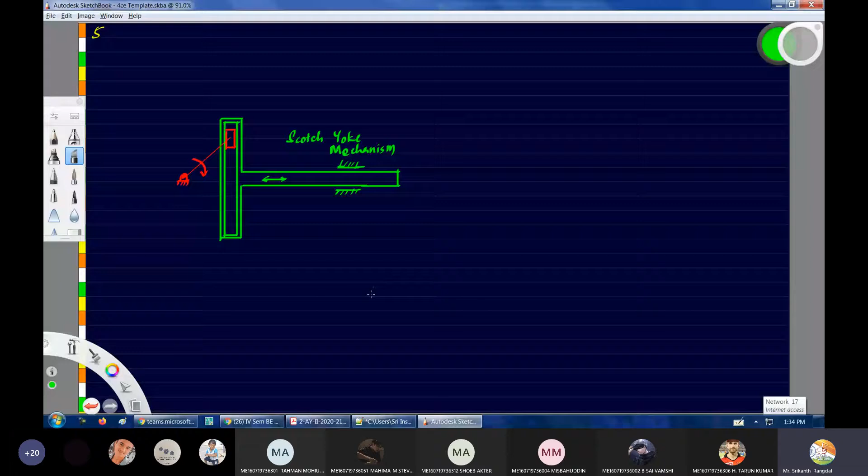So do you want the lunch hour to be extended a little? Fine. I'll just have a talk with the department HOD sir, and we will see whether the lunch hour can be extended. So let's proceed with the class. Even for lunch hour, it's too late, right? More than 1 hour is over. Anyway, the class is getting recorded, so let's not worry about that.

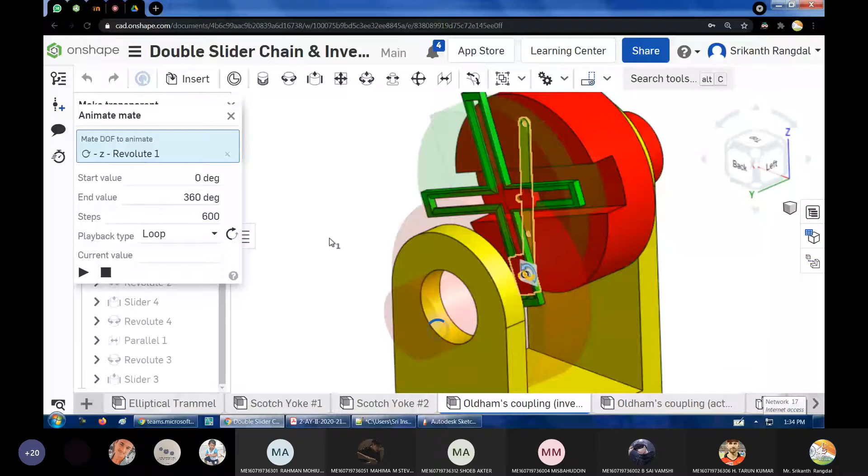Okay, so I was talking about this mechanism, right? The Oldham's coupling. So how these mechanisms can be the same, even though they are so different in shape, will become clear when I animate them. Okay, so shall I start? Let me see if it works perfectly. Hopefully it will. I have tested it multiple times. It's taking time. Yes. Okay.

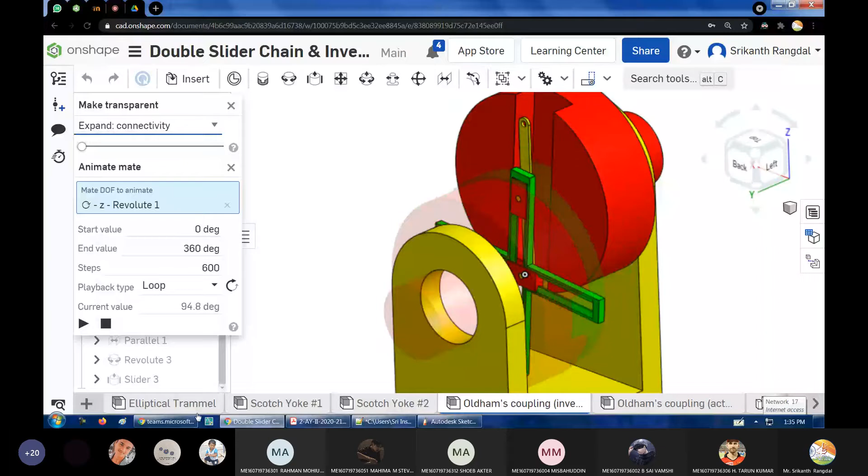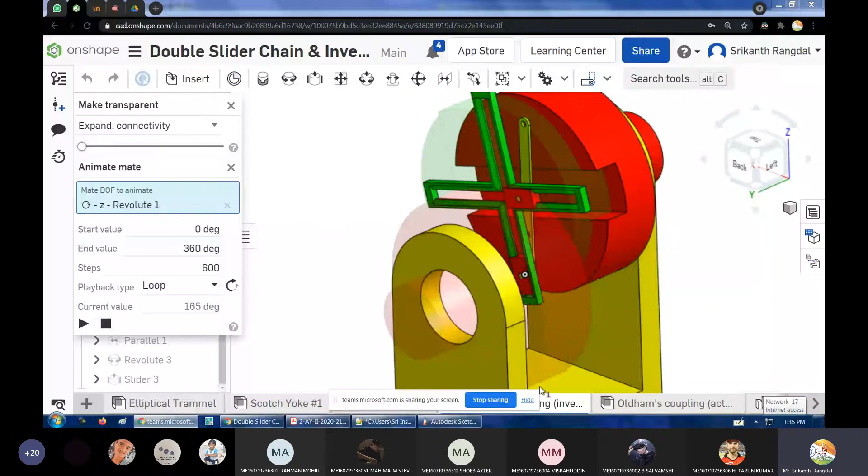Are you able to see how the motion is happening? Is this clear? Yes, sir. Here the yellow link is fixed, sir. Yeah. The yellow link is fixed. You can see this vertical rod is the same as the frame, which is so different in shape. And the red links, they are the same as these discs. One disc is getting fixed on one side of this yellow frame. The other disc is on this side. Are you getting it? Yes, sir.

Yeah. So this is how the motion happens. And this is why these differently shaped links are actually the same as the previous link that we have seen. Okay. Is it clear? Any doubts here?

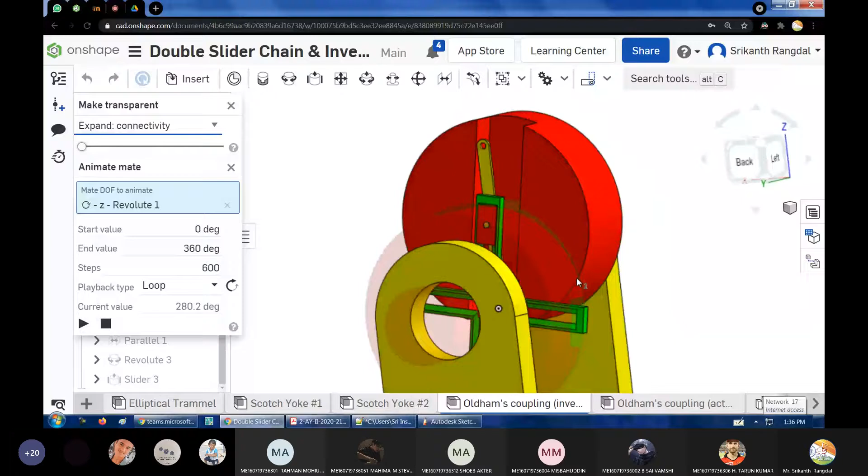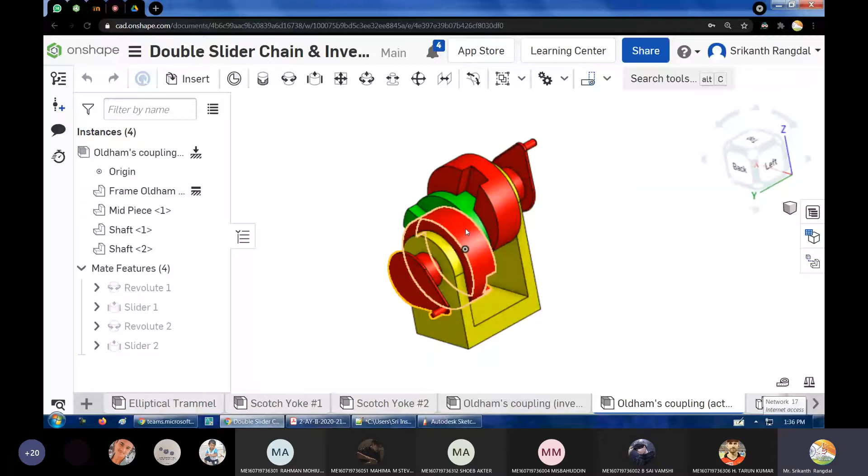Yeah. So this is how the actual Oldham's coupling is going to look like. You can see I have placed some handles on both the sides for the red linkages, and there are grooves in which the sliding will take place. Let me make it transparent so that you can see how the grooves are fixed. Can you see the grooves? These grooves will be sliding inside each other.

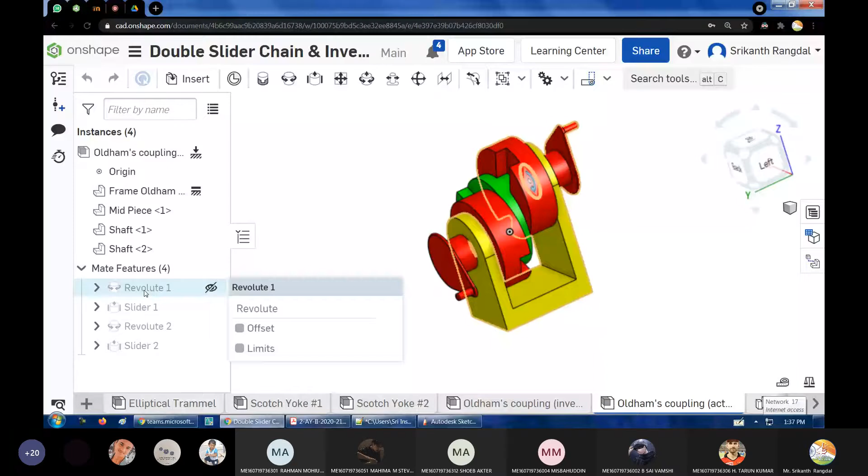Okay. So now let us see a few rotations of how this one animates. Ready? Okay, so there it goes. Can you see this? So the green link is sliding in the grooves of the red links.

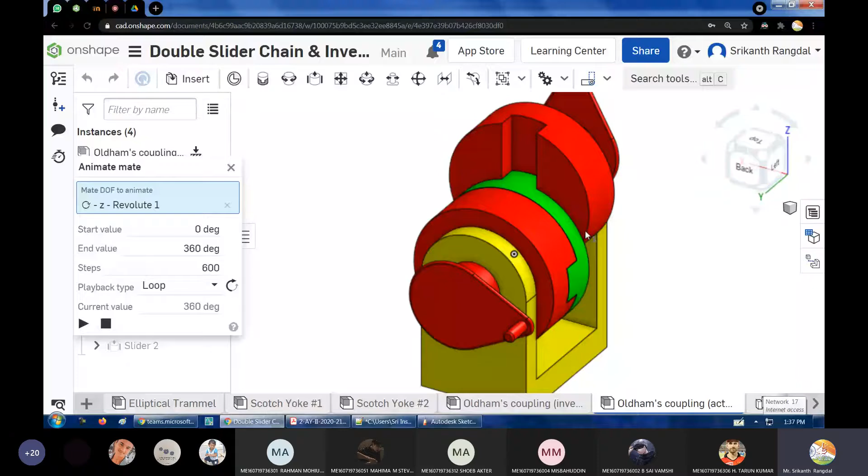And what is special about this mechanism? Can anyone point out what is special about this mechanism? In what practical scenario can we be using it? Anyone? Transmit the motion. Sorry? Transmit motion. Okay, so one of the red links will be input, the other link will be output.

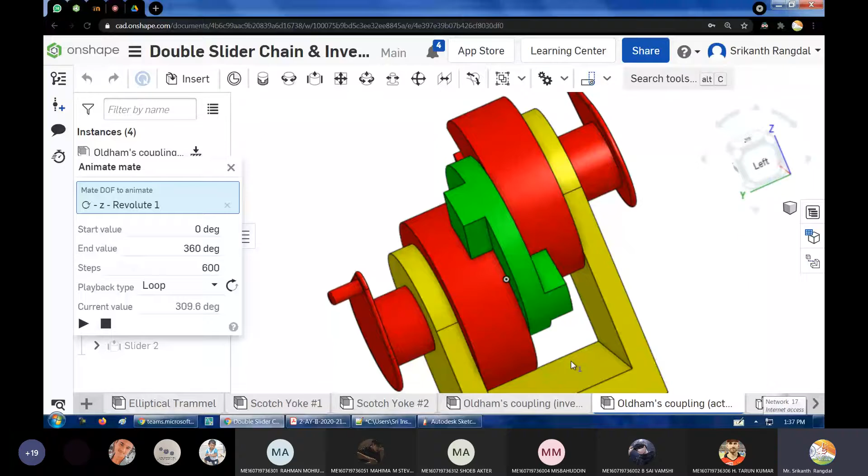Now, what is special about this transmission of motion? The special thing is you can see that the two shafts are not collinear. They are not in the same line. One shaft is here, the other shaft is offset from this, parallel to it. Correct. So the input and output shafts are not collinear, and neither are they intersecting. They are actually parallel to each other.

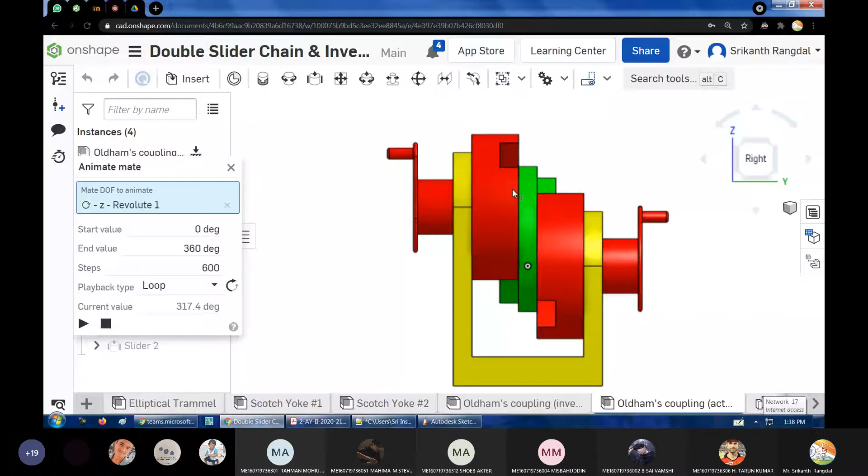And even when the shafts are not collinear, the motion can be transmitted. This is what makes this particular mechanism special. Okay, is it clear?

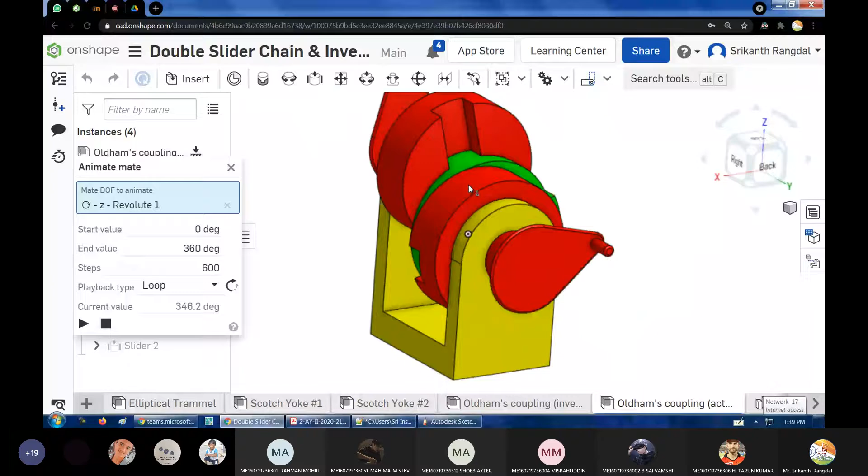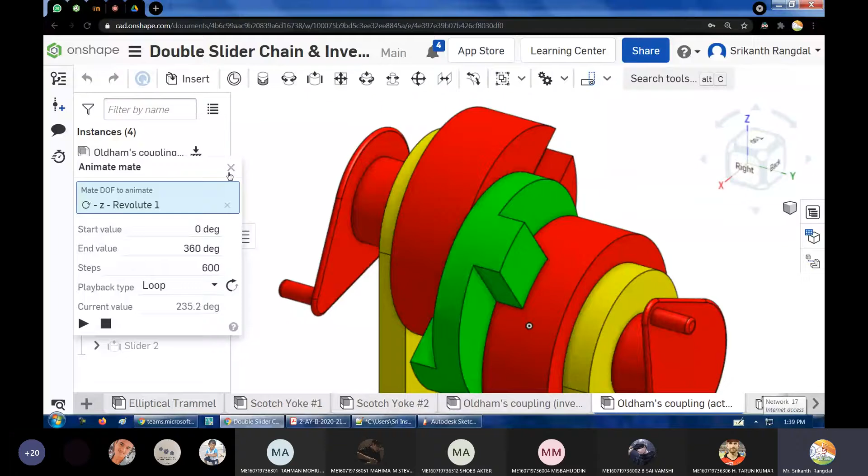Now in this mechanism, you will get problems on finding the sliding velocity. These two surfaces, the green and red, are sliding with respect to each other. So we may have to find the sliding velocity between these two links. So those are the kinds of problems which we may have to solve. Okay.

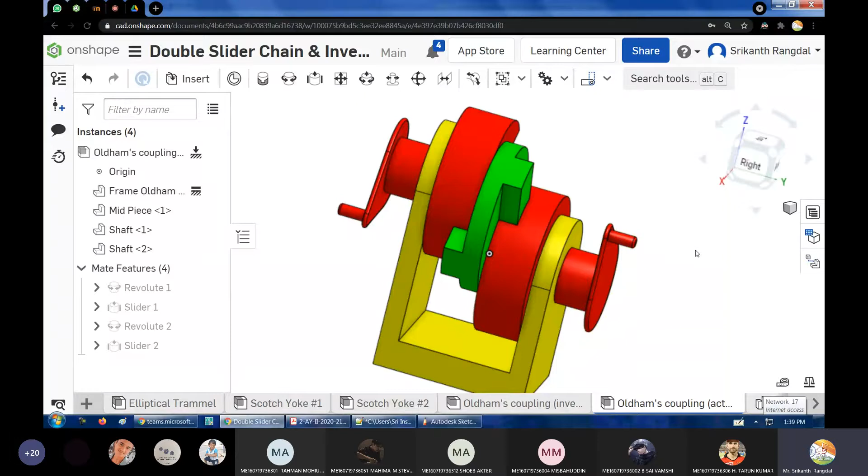So not only can you animate, but you can just click and drag, and it will function exactly as though it is moving, as though it is assembled properly. Okay. So this is the Oldham's coupling. Any doubts here? Any doubts? Is this clear? Yes, sir.

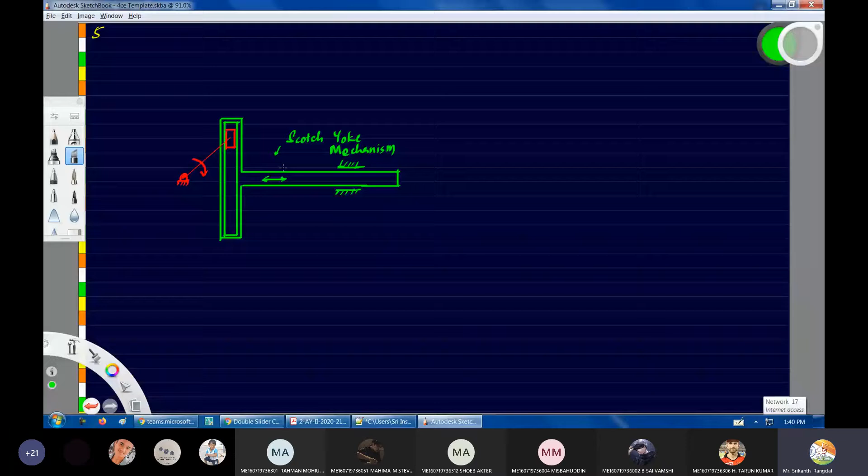Okay. So even though I'm showing you all these mechanisms in 3 dimensions, you should be able to draw them in 2 dimensions. So the Scotch yoke mechanism I have shown here with the diagram already. When it comes to the elliptical trammel, you should be drawing somewhat like this. Use a scale wherever possible, and you should be able to draw it like this.

Okay, can I use rubber? Okay. Mhm.

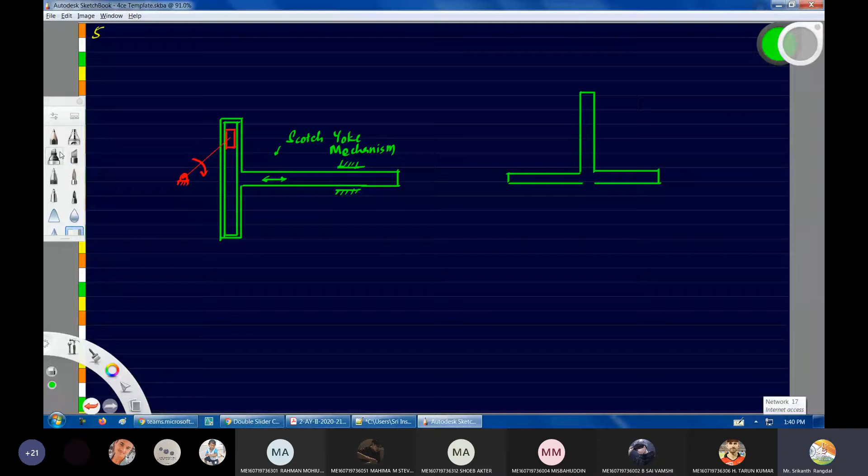Okay, so like this you can draw the elliptical trammel. Let me choose a different color. So here you will have the slider and the slider here, and we can go for another different color. Okay, so this is the connection link. That link we have to extend on the other side, and then that is where we'll have to write.

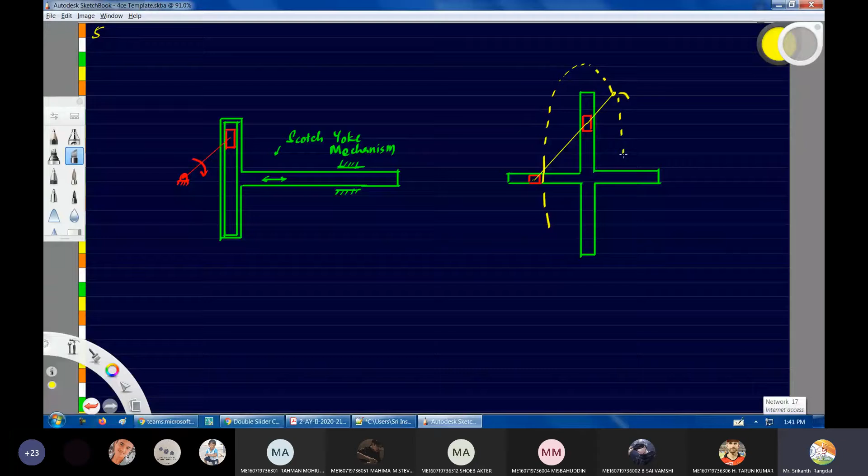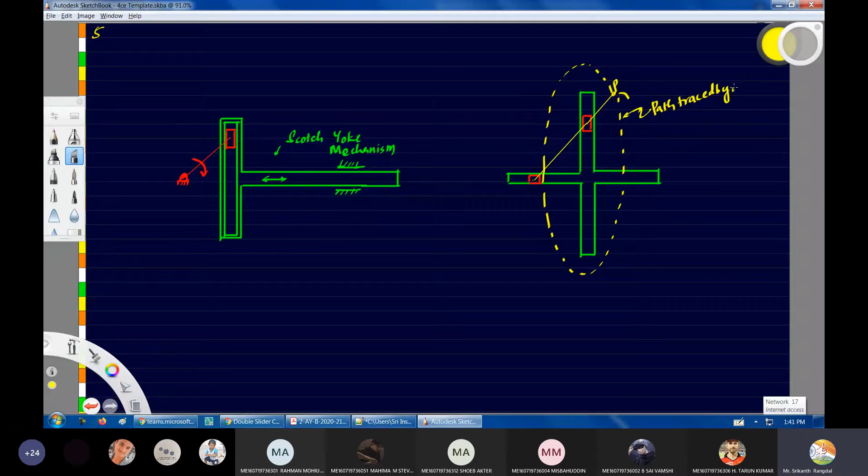Fine. So the path traversed, you can show it with a dotted line like this. So this you should show as the path. You can say the path traced by the point P. Path traced by point P. Fine. Then this is the frame.

Whenever you draw the diagram, it's very important that you label them. So here we have a slider, slider number 1, and this is where you have slider number 2. And this here is another link, a straight link. Okay. So this is how you should always label the diagram.

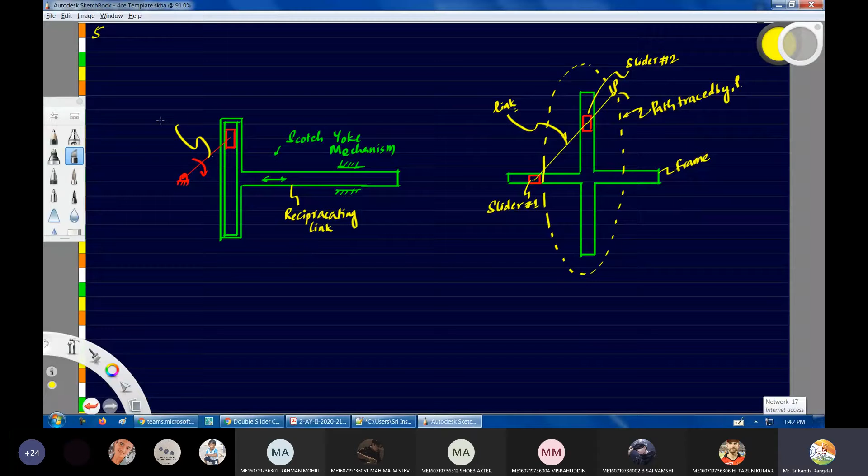This is the Scotch yoke mechanism, and this you can call the reciprocating link. Even though it is the frame in the case of the elliptical trammel, in this case it is acting as a reciprocating link. Whereas this one is acting like a crank, and here we have the slider.

And this fixed part is where the frame comes in. So the same frame is actually here as well. This part and this part, the fixed parts, are both the frames. Okay. So whenever you draw the diagram, make sure you are showing it neatly by labeling each and every part.

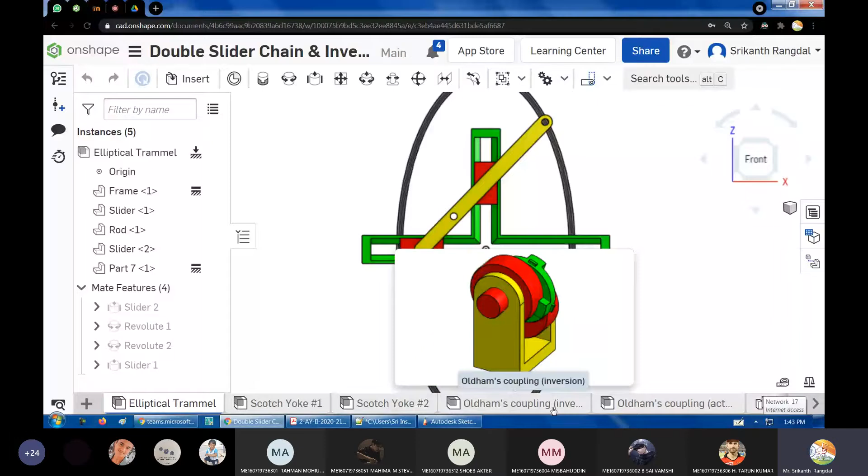So how will you draw the Oldham's coupling? That's the most challenging of the diagrams. You may need to practice drawing the Oldham's coupling multiple times before you end up with a satisfactory result. So some practice is always needed for that. Let me see.

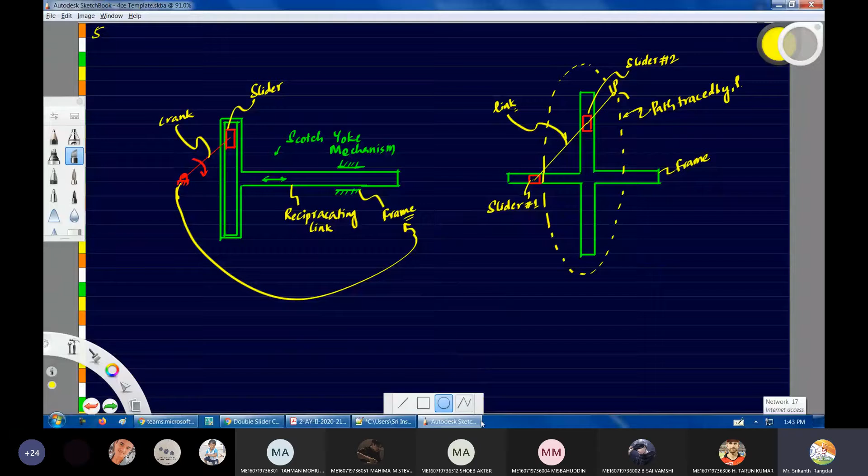In this case I'm using some extra tools here. If you don't have the tools, you may have to rely on your freehand drawing to draw it correctly. That way you can complete the 3D diagram. So this is all about the double slider mechanism. Any doubts here?

Any doubts here, ma'am? No, sir. Is this clear to everyone? Yes, sir. Okay.

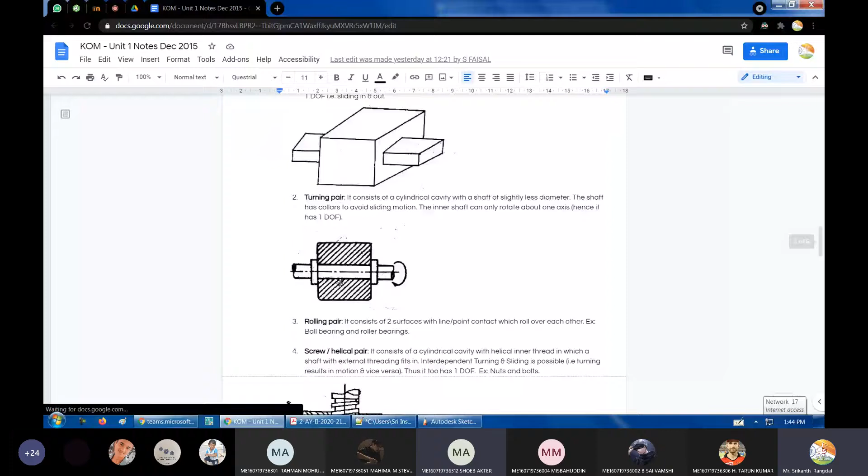So the crank is the yellow link, which is traveling in an elliptical path in the elliptical trammel? Yeah, the yellow one is the straight link. We cannot call the yellow one a crank because, as I told you, the condition for a link to be a crank is that it should rotate about a fixed point.

So in the elliptical trammel, is the yellow link rotating about a fixed point? No, sir. Both the points are moving, right? Yes. So there is no fixed point about which we can assume its motion. So no, we cannot call it a crank, even in this case.

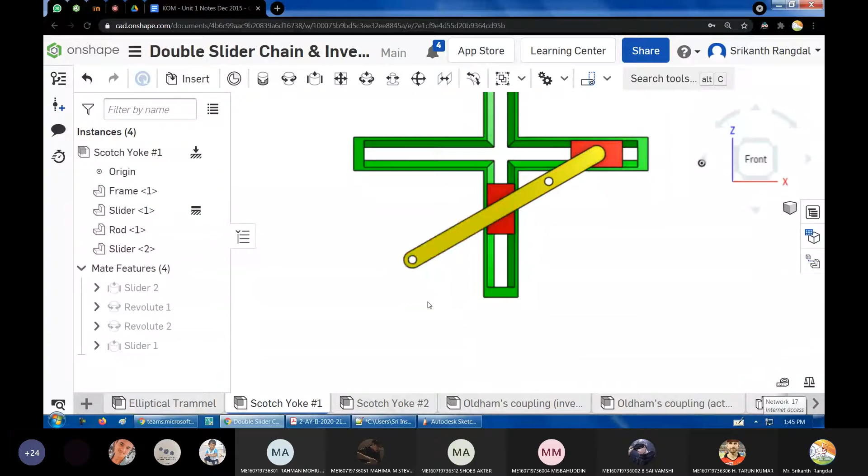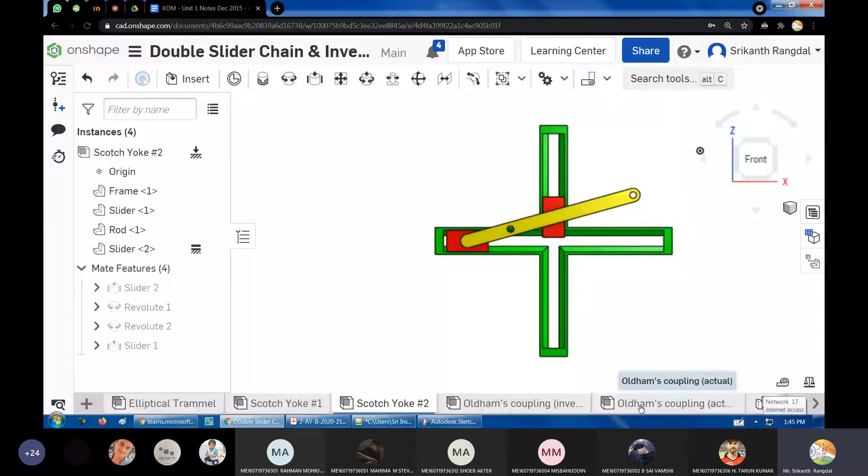In the Scotch yoke mechanism, yes, we can call it a crank, because in this case this red link becomes the center, and in the other Scotch yoke mechanism, this horizontal slider becomes the fixed center. So in the Scotch yoke mechanisms we have cranks, but not in the elliptical trammel. What about the Oldham's coupling? Sir, in the elliptical trammel, to rotate the yellow link, we use a crank. To rotate the yellow link.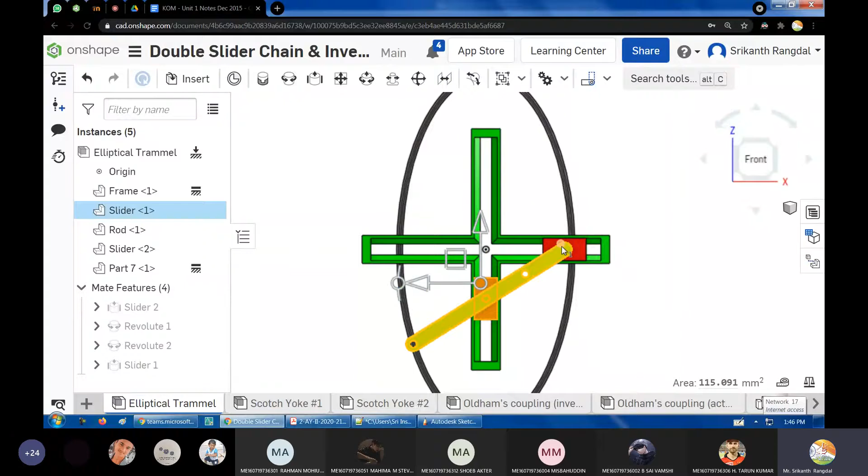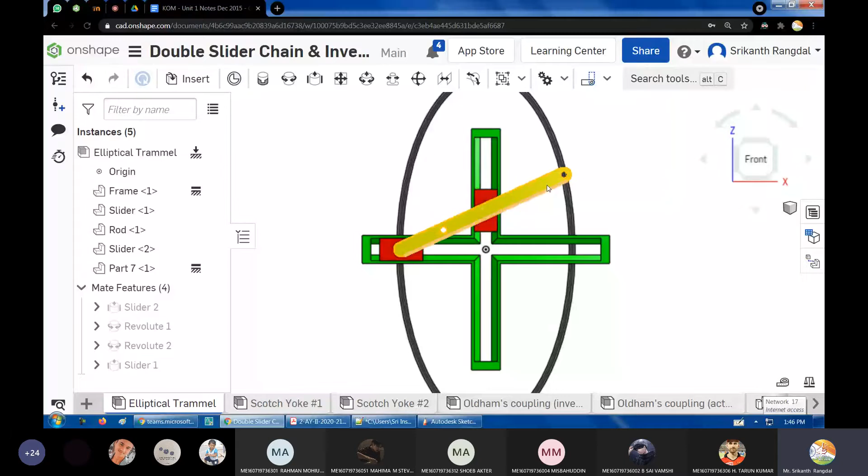No, no, no. To rotate the yellow link in a circular path, we use a crank and motor? No, you see, the yellow link is constrained with revolute joints at these two sliders. And we will not be driving it with a motor or something. So we'll have to manually move this yellow link. If you are thinking about automating this process, then no, we will not be using a motor to automate this.

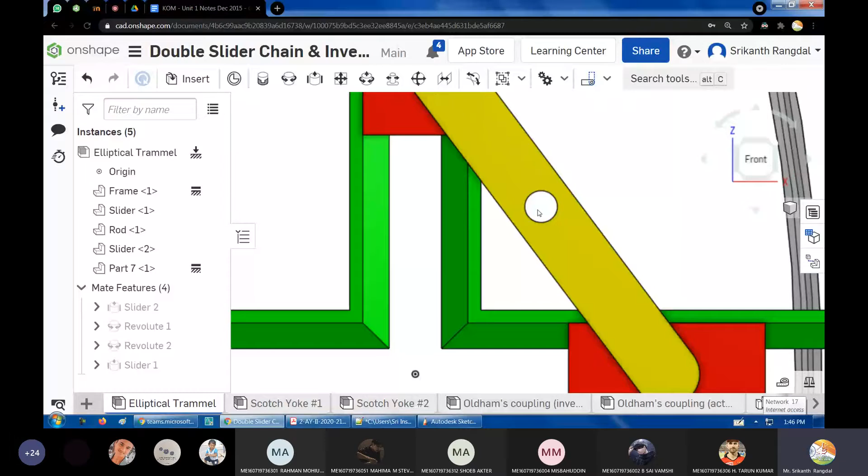Even though the center point, the midpoint between the two sliders, will be traveling on a circular path, we cannot use that circular motion to drive this mechanism. It becomes difficult. At some point, it will get locked. So that is not recommended.

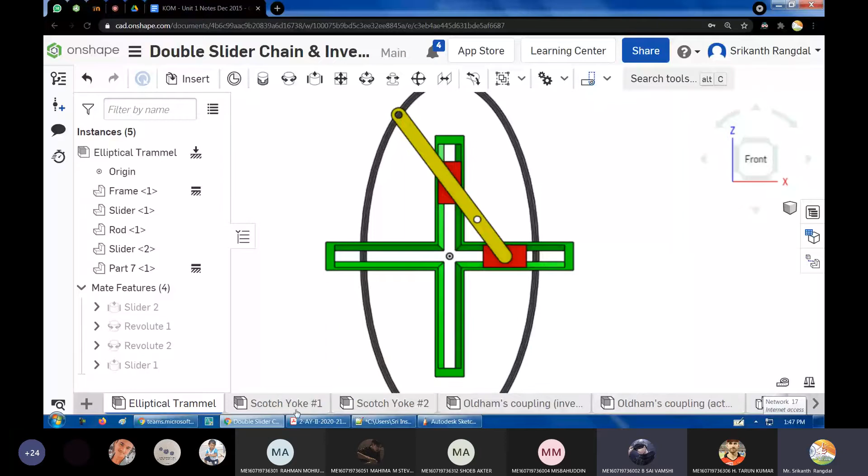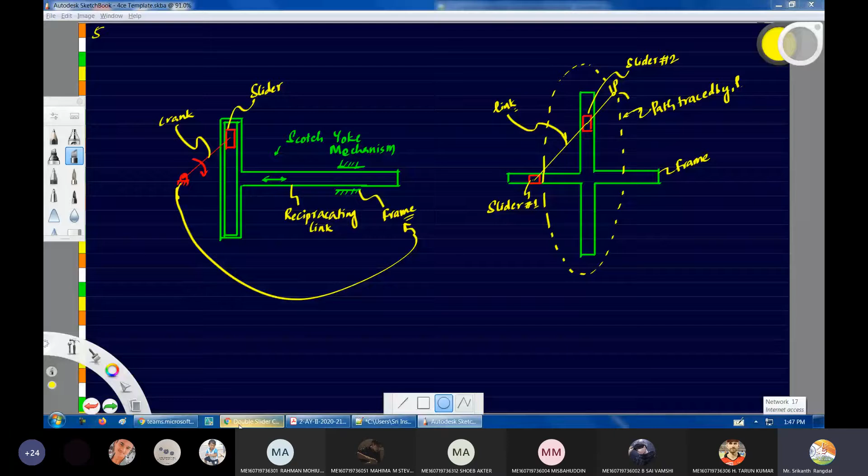Is your doubt solved? Yes, sir. Okay. Any other doubts? Fine. So I'll assume that all of you have got your doubts solved. Next, let us just go through the notes and see if something was left out. We have seen all the inversions of the 4-bar mechanism, double slider and all. That is in another file.

Where did that file go? See, it's always been difficult to find the right file. Just 2 minutes. Again, it got moved somewhere else. So this is the complete file.

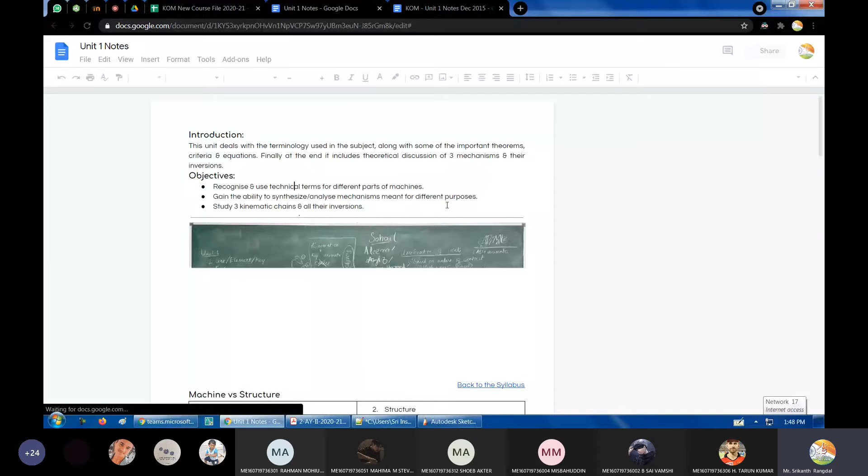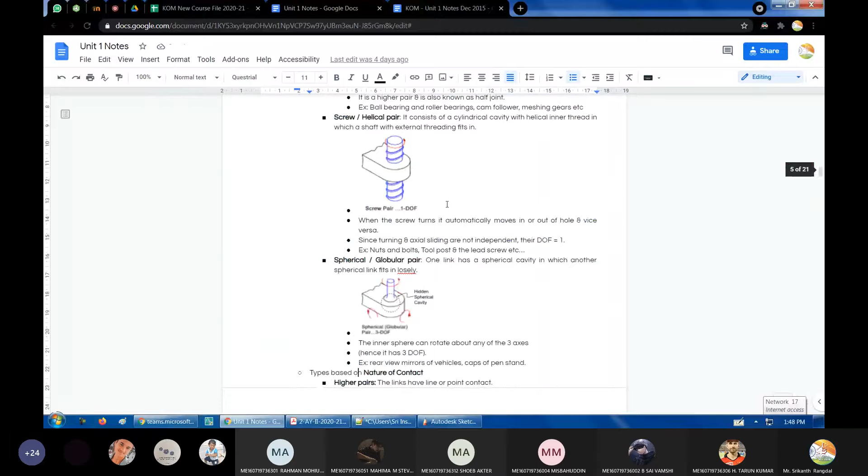So we have learned about all the definitions. We have seen this video. This unit 1 notes file, which I have shared, also contains some YouTube links. I highly recommend you go through those videos. They have been created by a professor from Maharashtra, Ujjwal Rani, and he prefers to use MicroStation.

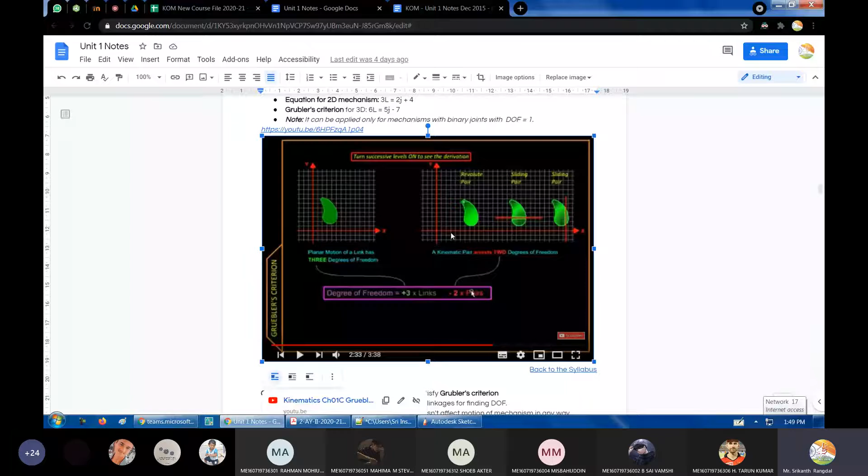This is another software just like AutoCAD, and it seems to be highly versatile. He's able to generate a lot of programs and various different mechanisms. I've kept the links to the YouTube videos along with the screenshots. The subject will become crystal clear to all of you once you go through all of these videos.

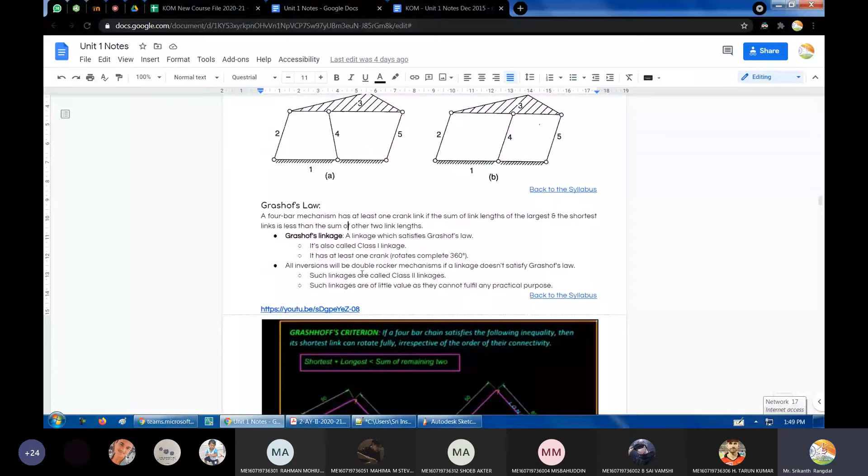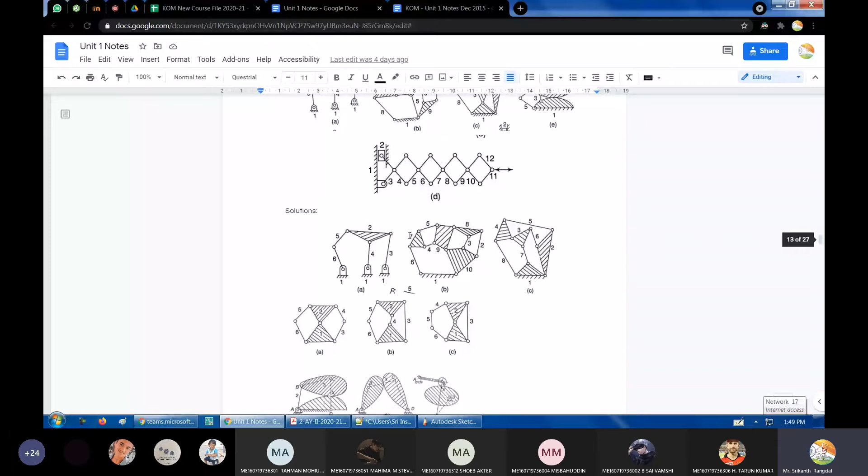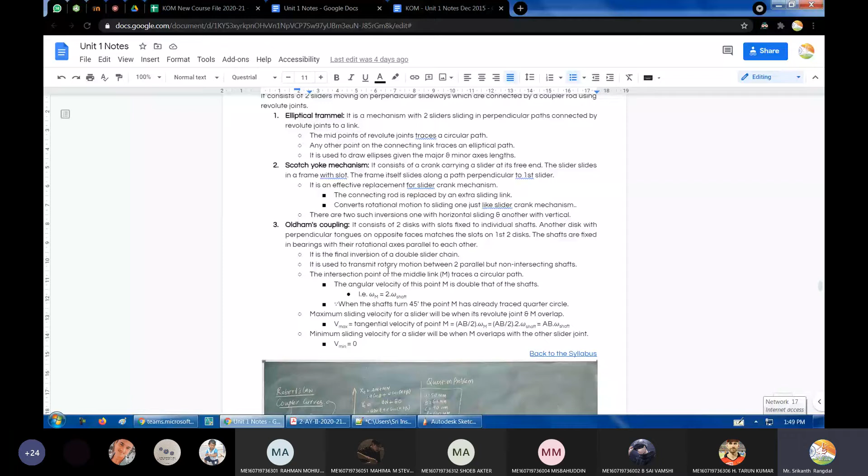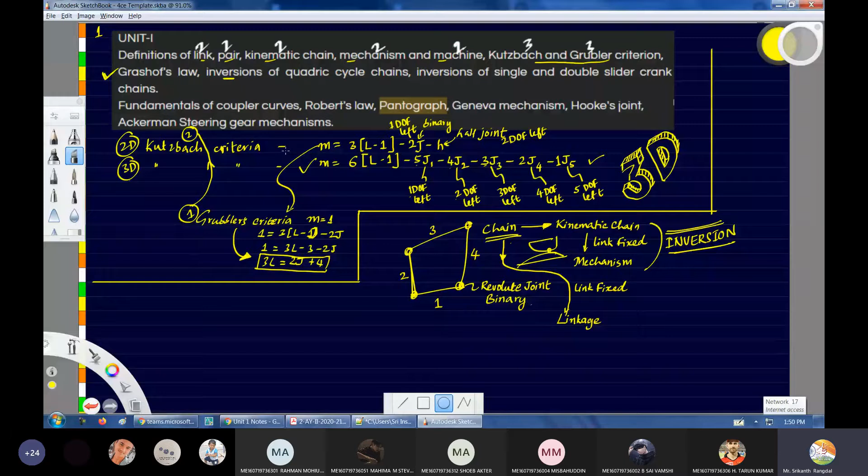All this has been covered. Hope you have practiced all these different mechanisms for Grubler's criteria. Practice as many problems as possible. And then we'll have to see the coupler curves. Coupler curves are there in the first unit, right? The syllabus is here. Next, we have to deal with coupler curves. Ready? Yes, sir. Okay. So let's start with coupler curves.

So what is a coupler? Anyone? Which connects two or more shafts, sir. Which connects two shafts. Is it? Coupler connects two shafts. Is it always two shafts?

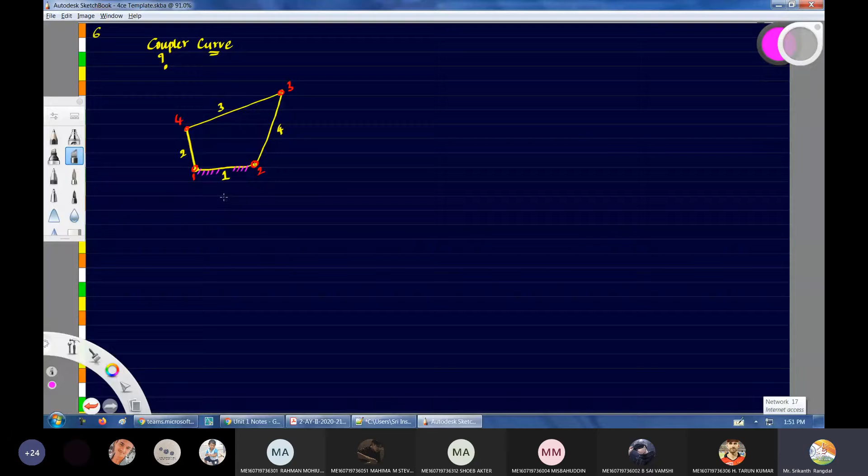Let us take this example. This is link number 1, link number 2, link number 3, link number 4. Coming to the joints, this is joint number 1, joint number 2, joint number 3, joint number 4. We are fixing link number 1. So which link is the coupler? Come on, tell me. Link number 3. Very good. So link number 3 becomes the coupler.

What about link number 2? Link number 2 becomes the crank. Why does it become a crank? Because it is traveling in a circular path, able to do a full 360 degree rotation. Correct. The link which rotates a complete 360 degrees about a fixed point is called a crank. Joint number 1 is fixed, and link number 2 is rotating a complete 360 degrees.

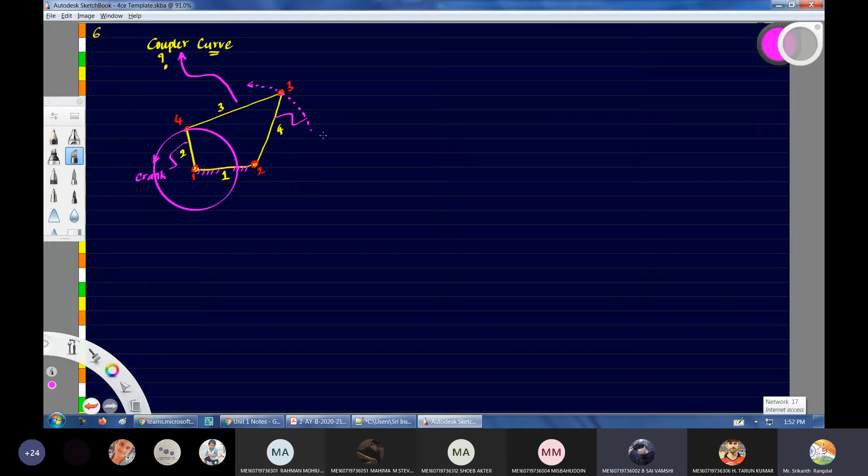What about link number 4? Crank? Link number 4 is called the rocker, because it will be moving to and fro, backwards and forwards continuously. This is called a rocking motion.

There is a humorous connection we can make with rock music. You must have heard of rock music. Yes, sir. It is played with an electric guitar, and there will be one person with a lot of hair moving his head backward and forward rapidly, right? Yes, sir. That is where the word rock comes from, and it has become rocker. The motion of link number 4 is the same as that of a guitarist playing rock music.

So link number 3 is called the coupler. Now, coming back to our concept, we have something called a coupler curve. What is a coupler curve? Coupler we understood: link number 3 is the coupler. Now what about the curve? What will be a coupler curve? Come on, try to guess.

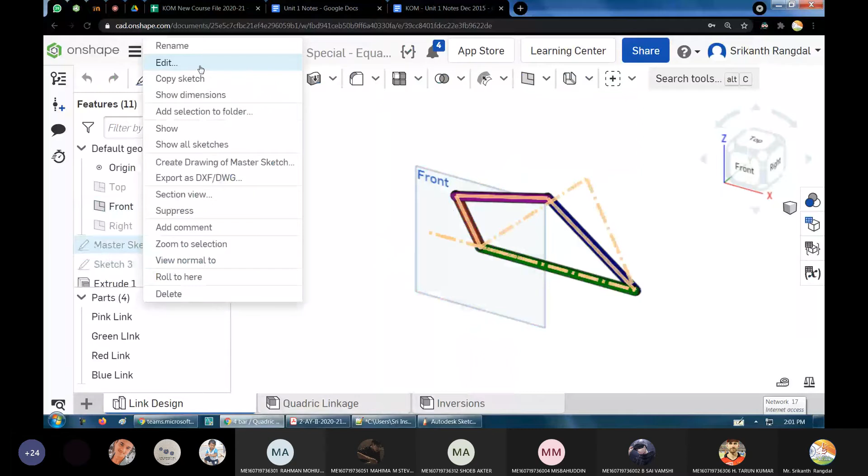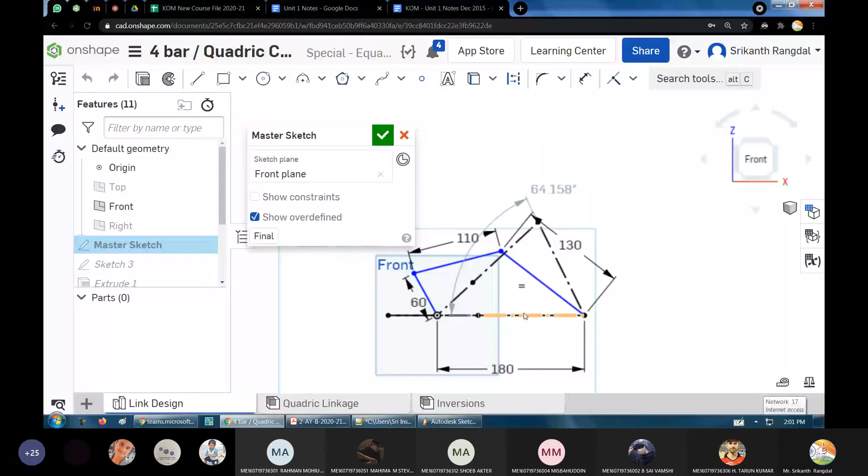So let me show you this by using our quadric chain. Okay, this is where it is. Let me go to this master sketch. So this is the mechanism here. What happened? Okay, so these are the special cases. Let's see this further.

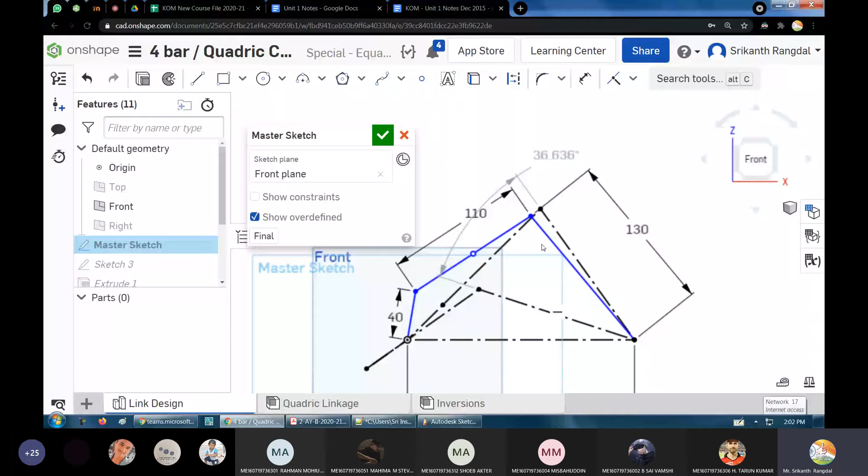So now what I'll do, let us find the coupler curve for the midpoint. Okay, let's find the coupler curve for the midpoint. So how did I say we can do it? Delete all these extra lines to avoid confusion. Okay, so this is the mechanism. Is the mechanism clearly visible to everyone?

Yes. Okay, so the blue links, they are moving, correct? The blue links are able to move, and there is a point I have kept at the center. So the path traveled by this point is what we want to find. Okay, so how did I tell it can be done? So you have to take this crank at multiple steps. So first let me keep it like this. Then I will choose this point.

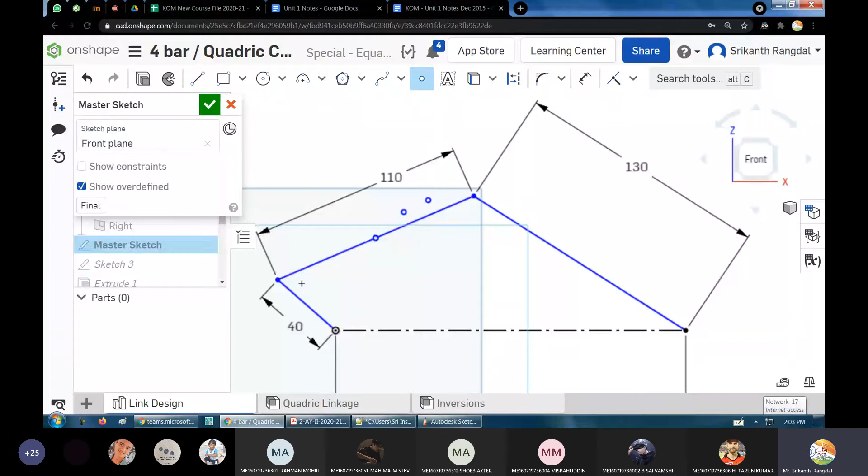Okay, then I will move it to the next position. Fine. Again I will choose a point. Then again move it to the next position. Again I will take a point. Fine. Move it again to the next position. Again I will take a point. So this is how you can solve graphically. Okay, are you getting it? This is how you can solve it graphically.

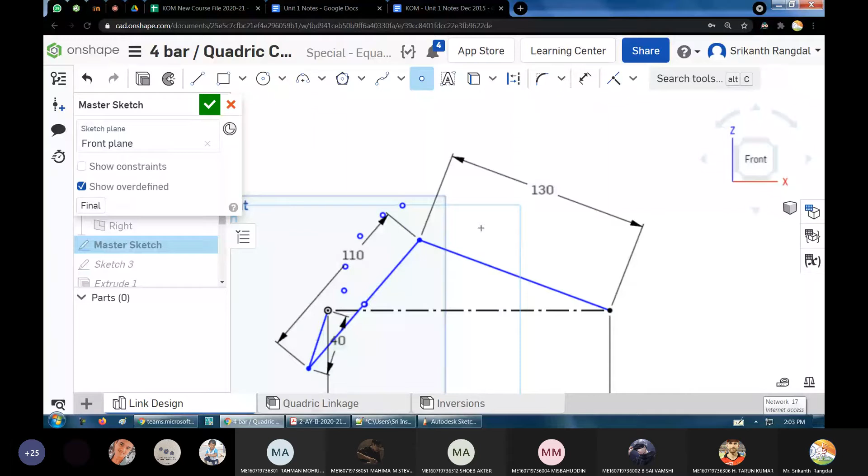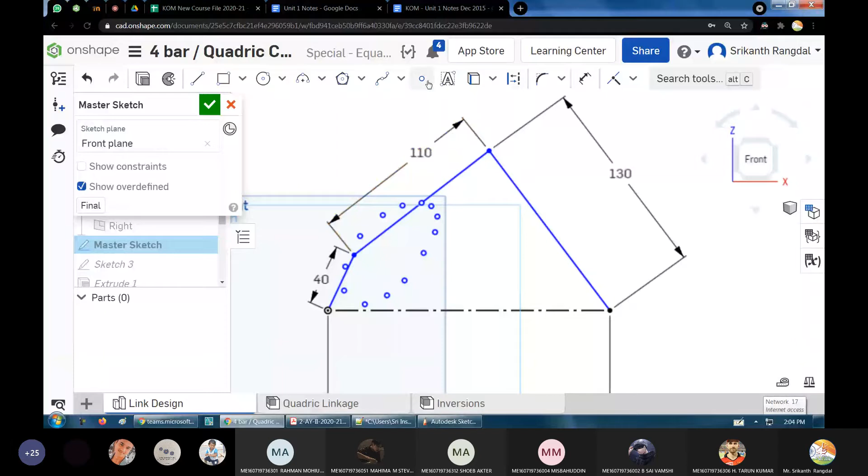So how is the shape coming out to be? What is the shape? Ellipse. Is it exactly ellipse? Is it ellipse exactly? Yes, sir. Yes. How many say it is exact ellipse? Raise your hand. I will check it in a while. Fine. So you can see the rough shape of all these points, right?

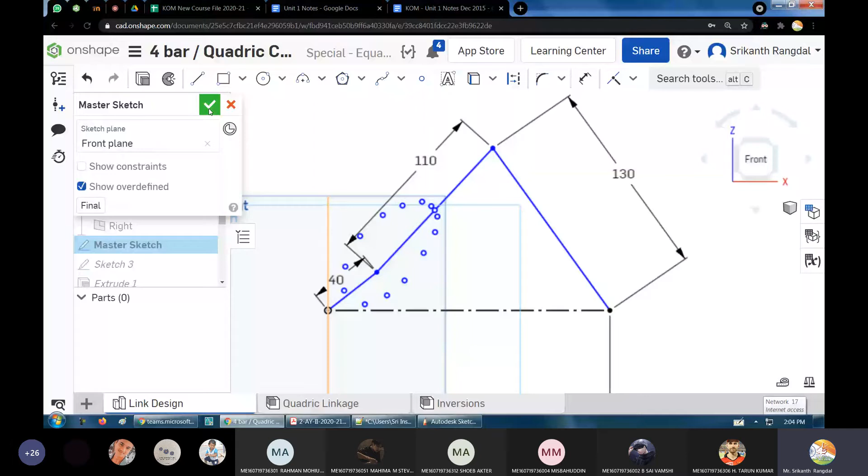So how many of you are telling that this is an exact ellipse? Raise your hand. Let me see how many have raised. Okay, 6, 7. So 7 members think this is an exact ellipse. Is it exact ellipse? Let us find out. Let us see if it is exact ellipse. Okay. Hyperbola, I guess. Sorry?

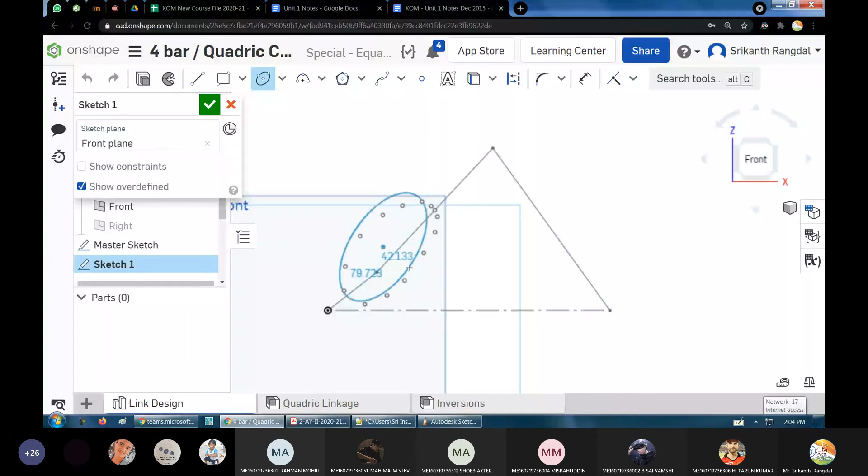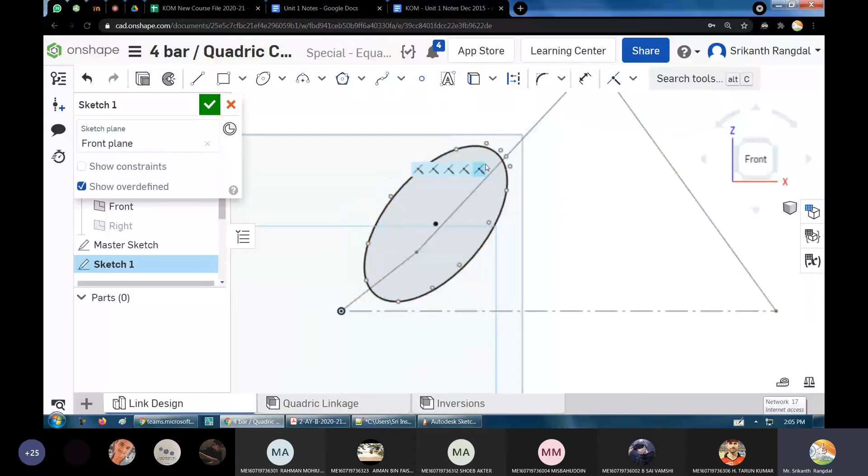Let us see. So I'll take a sketch and now we'll choose an ellipse. Okay, let us coincide this. So is this ellipse? Hyperbola, I guess. Hyperbola. Hyperbola will not be closed, right? You see, now the ellipse has got constrained and so many points are going out of the ellipse, isn't it? They are not in the ellipse. So this path is not elliptical.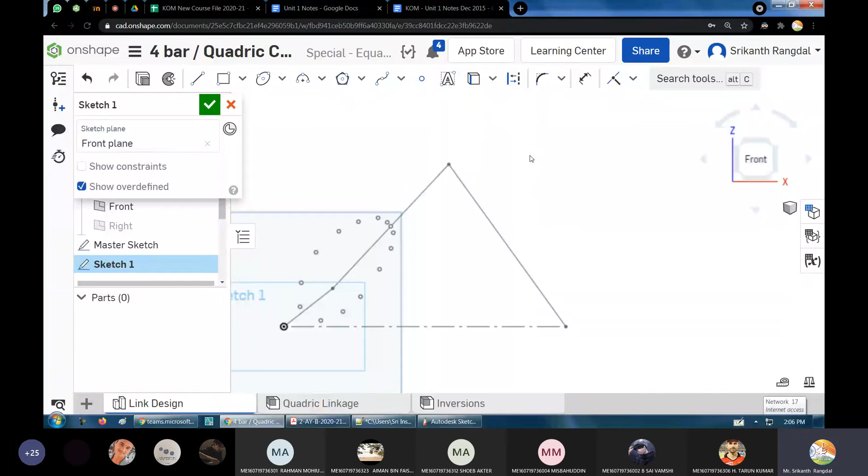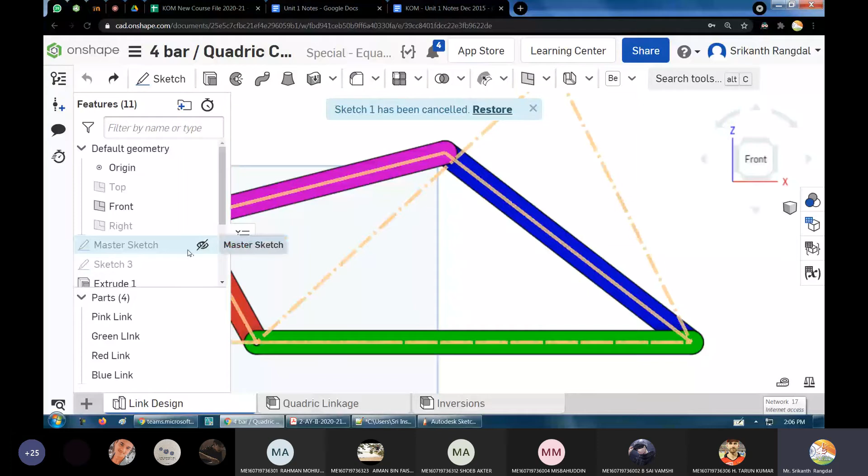I already told you, as the point that we are considering moves towards the crank end, the shape becomes more and more like a circle. And as it moves far away, it becomes more like an arc. But the shapes in between, they are not elliptical exactly. Fine. So we got to be careful about this, right? I'll remove all the changes made. Okay. Fine. So is this clear? What is a coupler? You understood how to get this?

So here I have used the software, so I was directly able to move the mechanism and get the different points. But if you are using geometric instruments, you'll have to create a fixed number of positions for the crank, and for each position of the crank you will have to draw the complete mechanism, and after that you will have to take whatever point we were supposed to on that mechanism. Now, all such points that we get, we have to join them. Once all these points are joined, we will get the coupler curve.

Now the point that we are talking about, it may not even be on the link. It may be a point which is away from the link as well. So here in the notes you can see

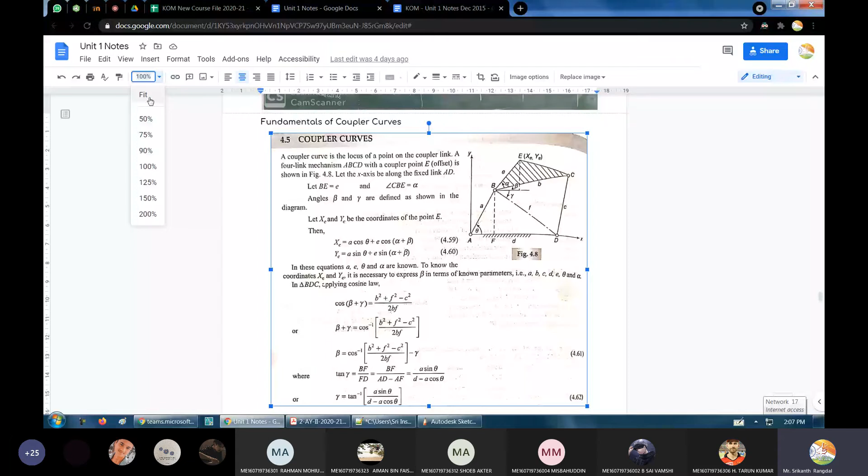Okay, so are you getting my voice clear? Is there any disturbance? Yes, sir. No. Okay, fine. I just turned on the fan. If there is more disturbance, please let me know. I'll turn it off.

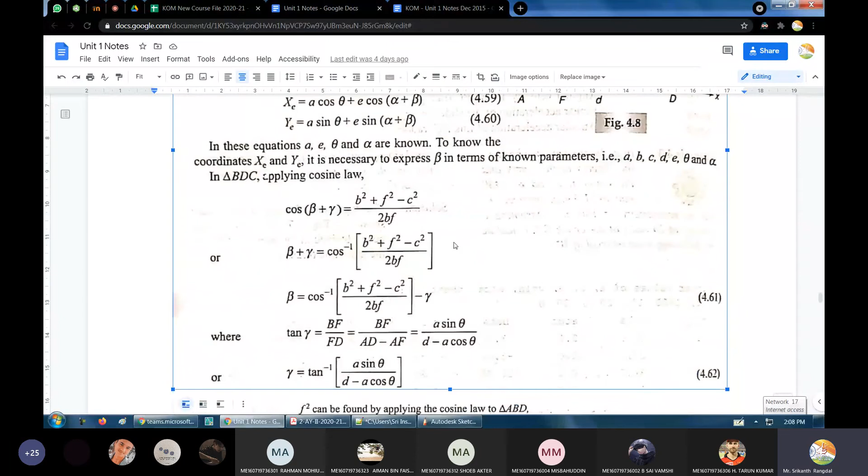So here we have the 4-bar mechanism. The link AD is fixed, DC is the rocker, AB is the crank, and BC is the coupler. Now in this problem, we are finding the coupler curve for a point E. Now the point E, you can see it is not lying on the line joining B and C. It is away from it. Okay, so this problem we will take up in next class, and we will see how to solve it. In fact, I was able to create this.

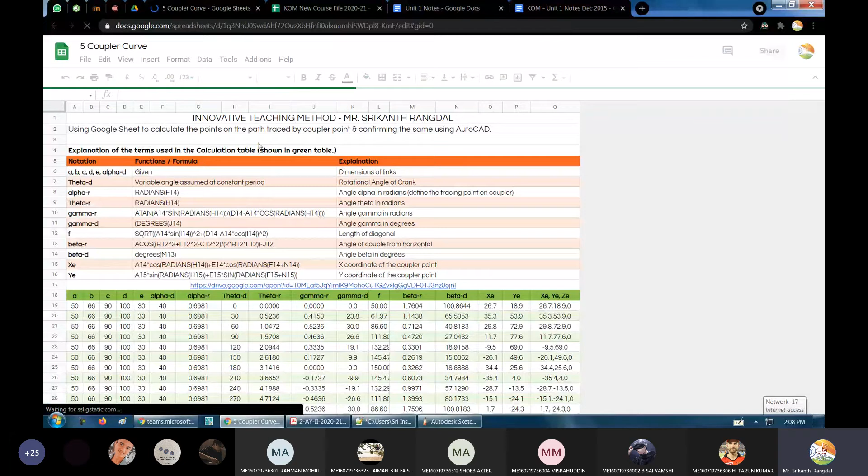I was able to create a Google Sheet containing all the formulae. So we have to find a formula to find the coordinates of the point E at different positions of the crank. Fine. So this particular sheet, you can see I have put all the formulae. These are the formulae, and these formulae I have used to find all these values. And at the end here, what you get, these are the coordinates of the point E at different angles.

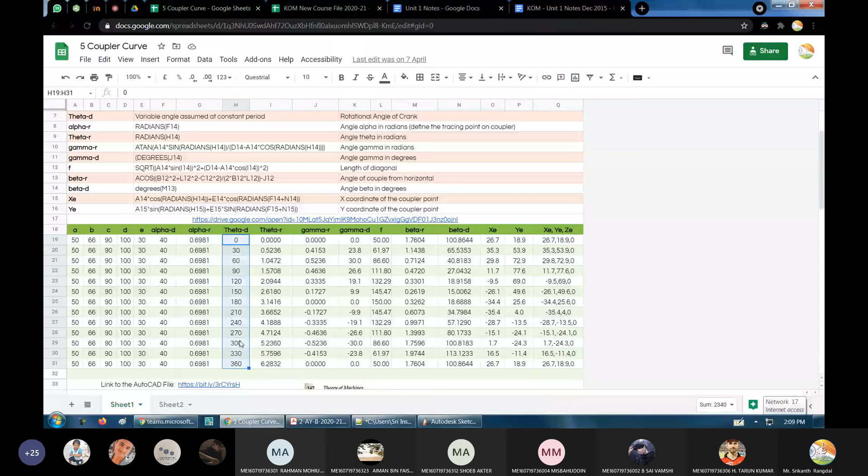Fine. So the angles have been given here. Is it visible to everyone? Is it clear? Yes, sir. So here you can see the angle is given. So angle 0, angle 30, 60, 90, and so on for complete 360 degrees. I've taken the angle at periodic difference.

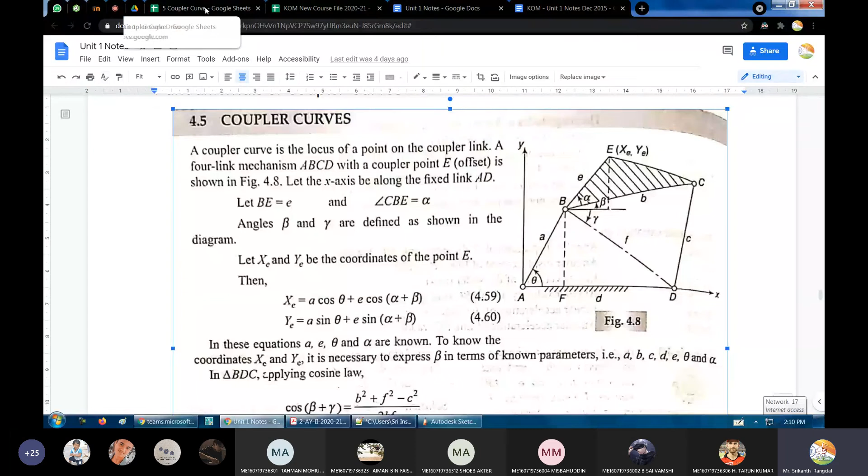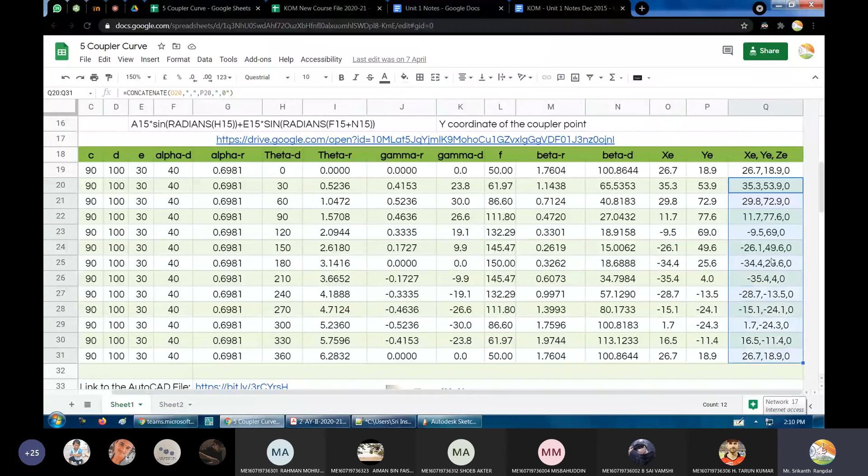Fine. So these values are all fixed. So you can see for all the rows, these values are the same. And this value is what is different. This value is theta. So theta is changing for the crank. And for this value of theta, I have found the coordinates of E for every position. And when I'm feeding all these coordinates into the AutoCAD file, I will get all these points.

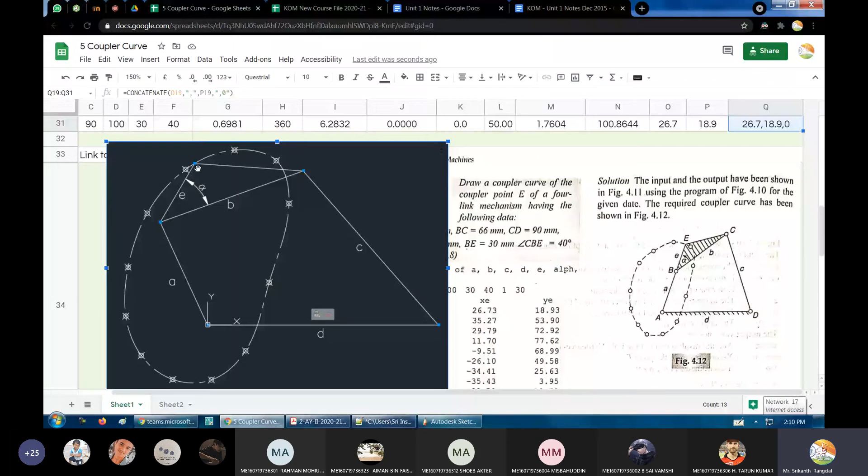Fine. And when I move this linkage, when I move the link a, this point E will travel on this path. The capital E point will always travel on this particular path. Okay. So we will see how to use this sheet and how to do this analysis in the next class. So for today's class, any doubts?

Sir, why did you take the point E? Because the coupler is BC or something. You see, the shape of the coupler may be a triangle also, no? Shape of the coupler may be a triangle. So on that triangle, there is a point called E. Okay.

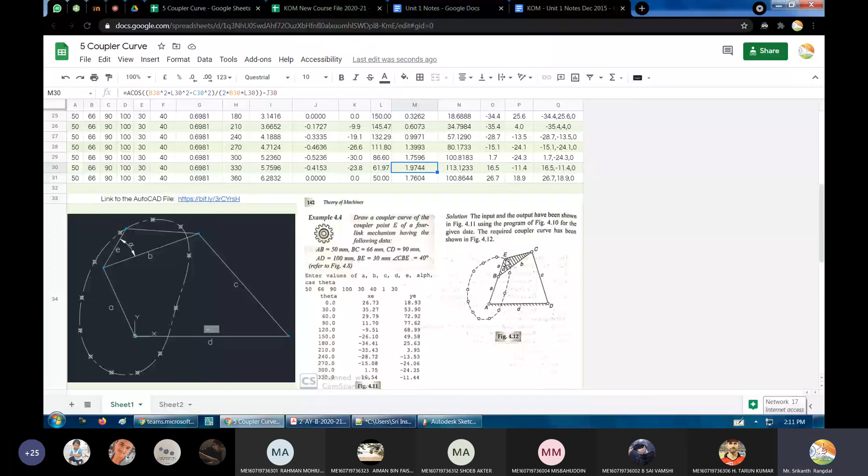So am I using too much of technology? Is it becoming confusing for you? I hope it's not. If for some students it's becoming difficult, then please let me know. Your feedback is also very, very important. This subject is a very tough subject. Very few of your seniors were able to clear this in exam, right? So if any of you are feeling any difficulty in understanding the concept, or how exactly you're supposed to study this subject, please let me know.

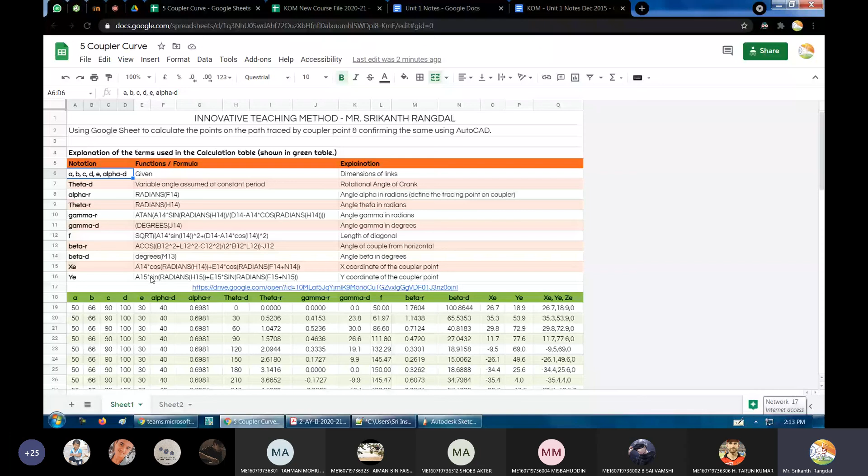So I'm trying to use as many advanced features as possible, and I'm doing this to give you the best. Because even though our syllabus is very, very classic, the industries need you to have a lot of advanced skills if you really want to cope up with the industries of today. But the Osmania University syllabus is very old fashioned, and that is why, to get you all the skills, I'm trying to use as many technical tools as possible. So here I'm using Google Sheets, then I'm using Onshape for showing you the 3D models.

Even though it looks very simple when I'm showing it to you, if you don't practice how to draw these mechanisms at home using your instruments and your free hand, then it's going to be really difficult for you to answer in the exam hall. So I request you all to continuously go back to the book, do the notes if required, and draw as many diagrams as possible using your free hand as accurately as possible.

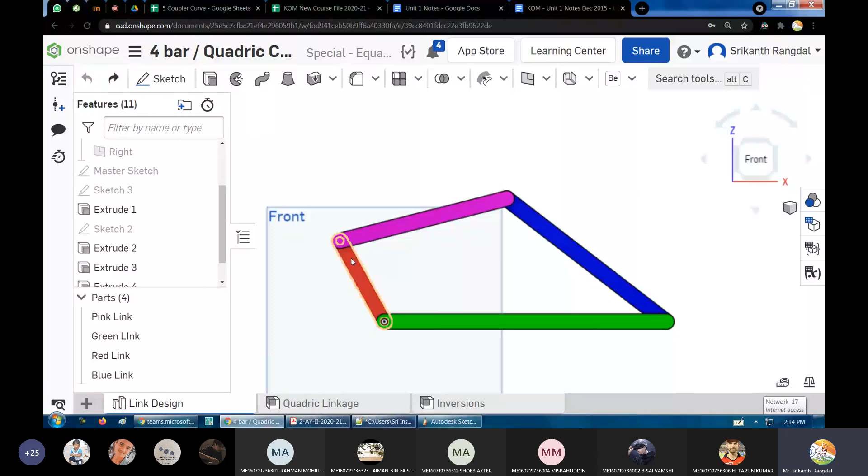You don't have to exactly draw it measurement wise, because this subject is not a drawing related subject. At least you should be able to show the basic shape and what's actually happening. So a good enough diagram which is able to describe what is actually happening to the mechanism, that you should be able to do.